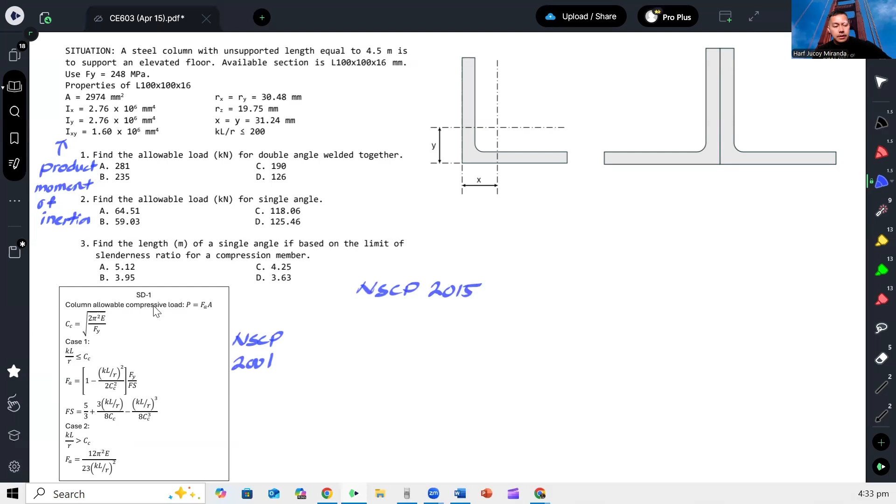The nominal compressive strength PN is Fy times AG, same as before - actually it's FCR times AG, so it's similar to this. FA is used instead since it's allowable.

Then CC, that's the limiting slenderness ratio. Previously it was 2 pi squared E over Fy. Now it's 4.71 times the square root of E over Fy.

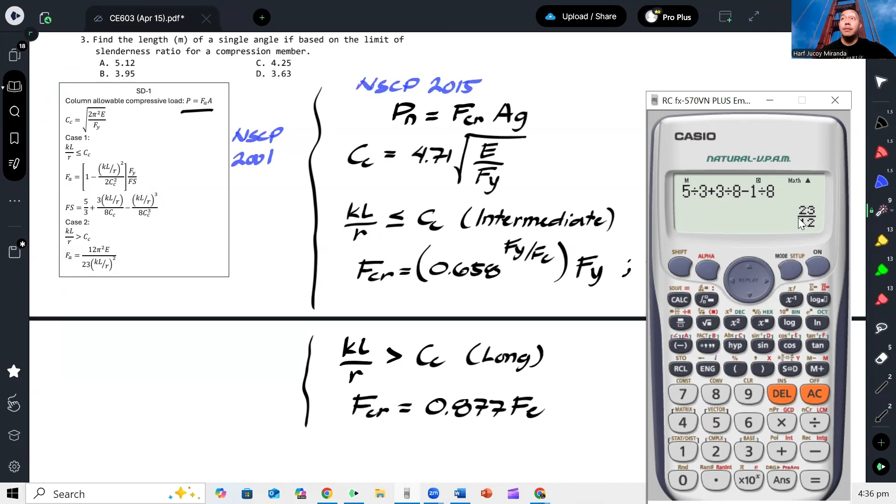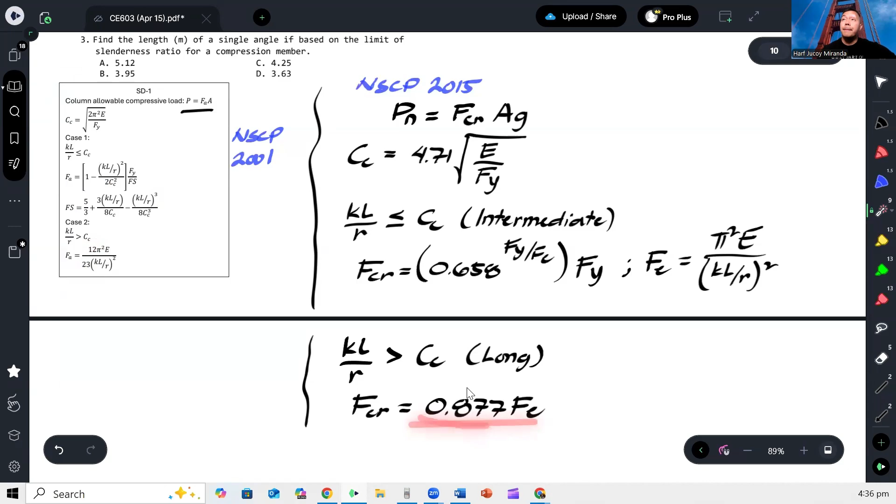That's the factor of safety applied to Euler's formula. For us now, it's 0.877. But this is still a type of provision that still appears in the board exam, so it's good that we're familiar with how to use it. This is also given by Ma'am Praxi, in case she wants it used.

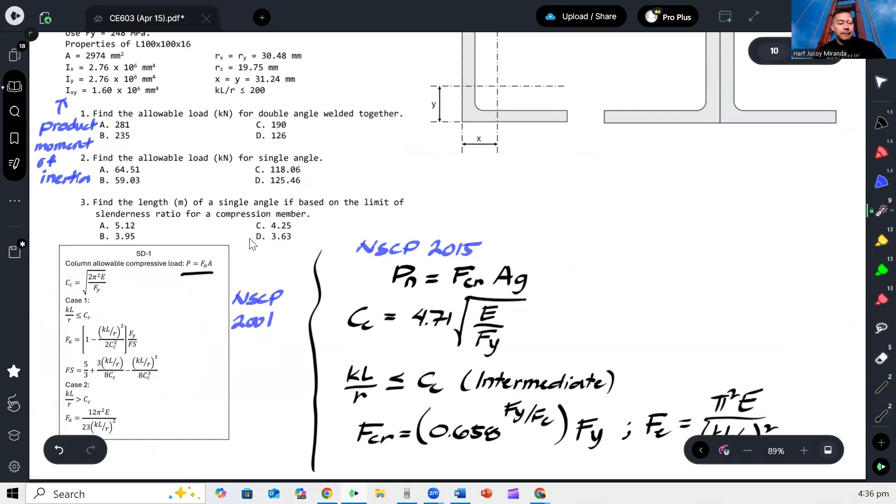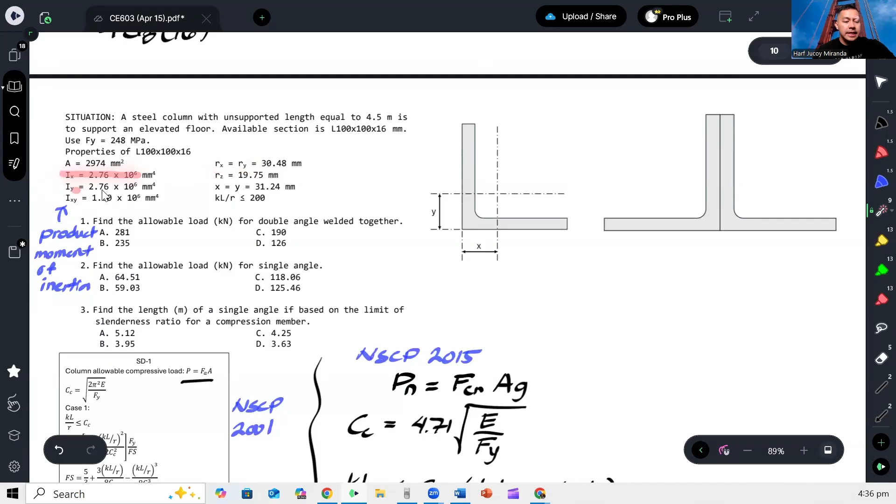Okay, here's how it works: the centroid, when on the Y axis, is now at the center. So that means, in calculating IX, it's simply 2 times the original IX.

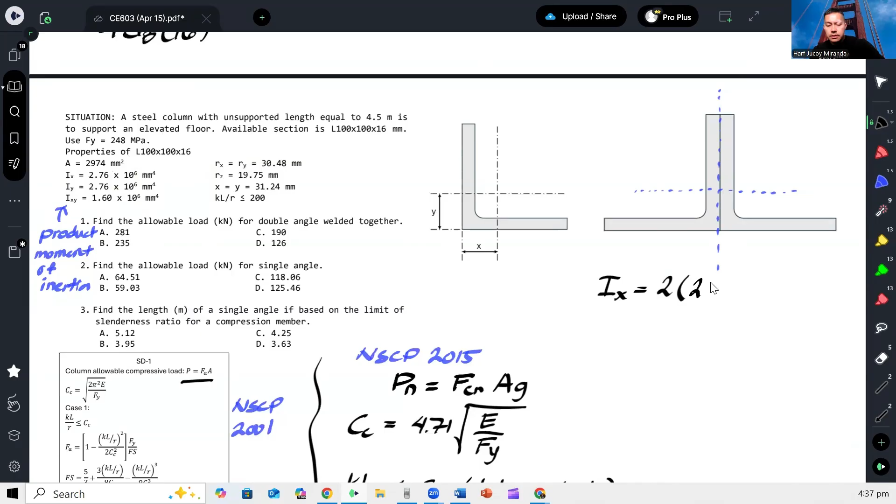Okay, why? Kasi yung Ix nito, kailangan mong i-transfer dito rin. So wala ka ng transfer formula, no? Wala ng plus AD squared. Kaya lalabas yung Ix ng double angle is ilan to? 5.52.

Pero yung Iy, kailangan i-transfer, no? Kasi ito yung original na centroid eh. Tapos andito na yung centroid natin sa gitna. Okay? So, ang tatandaan lang natin, ang distance na to is yung X mismo, which is 31.24. Okay? So, that's gonna give us yung Iy natin, 2.76 times 10 to the 6 plus transfer. Yung area, 2974 times yung X.

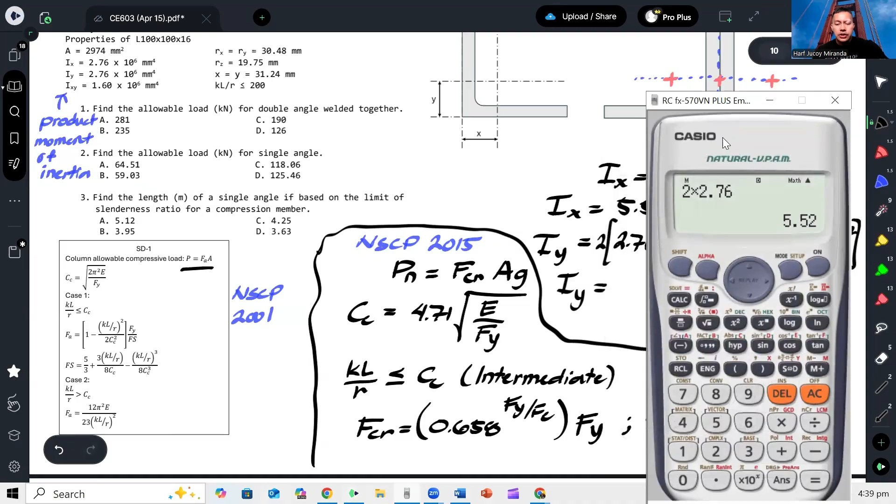Okay, so 31.24 squared. Okay, tapos times 2 kasi dalawa yung angle. So yung Iy na lalabas dito, so actually mas malaki yan. So that gives us 11.32 times 10 to the 6. So mas malaki.

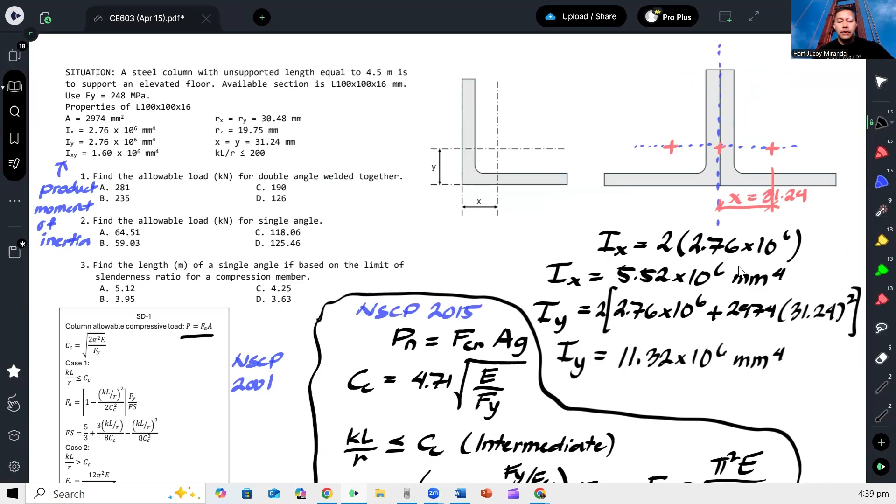Okay, and dahil ito ay column, di ba sa column, ang hinahanap natin dyan na slenderness ratio is yung critical slenderness ratio. At yung critical slenderness ratio is yung largest. No? Okay, at para ma-achieve natin yung largest na critical slenderness ratio, di ba yan ay KL over R.

Okay, we want R to be smallest as possible. Tapos yung R naman, di ba yan ay square root of I over A. So we want, in order for our R to be as small as possible, we have to make our I as small as possible. Ibig sabihin, yung I na may mas maliit, yun yung weaker axis, di ba? So ibig sabihin, yung R din na maliit, yun din yung weaker axis. And it turns out na kapag maliit yung R, malaki itong slenderness ratio. So ibig sabihin, kapag malaki yung slenderness ratio, yun yung weaker axis. Or yun yung ibig sabihin ay yun yung, or doon mangyayari yung buckling.

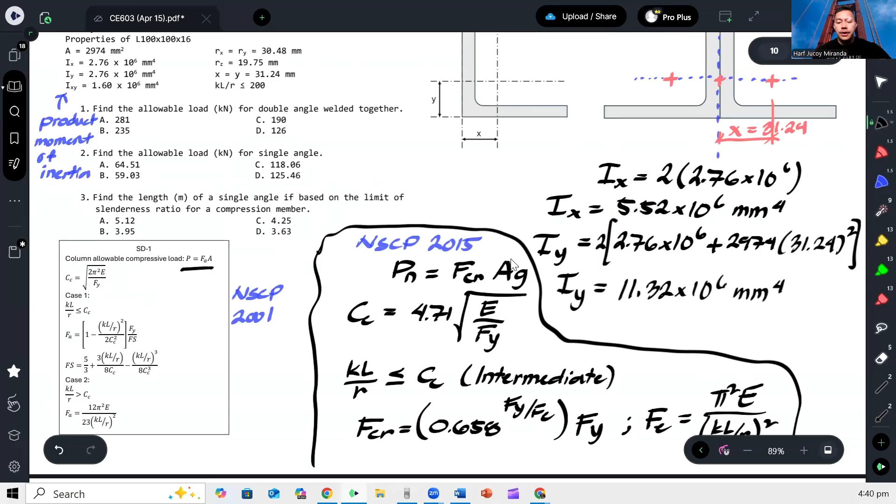Okay? So dahil kapag kinumpare natin itong dalawa, mas malaki naman to dito. So doon sa x-axis siya, possible na mag-buckle, no? So kunin na lang natin yung Rx. That is square root of Ix over A. No? Since Ix is less than Iy.

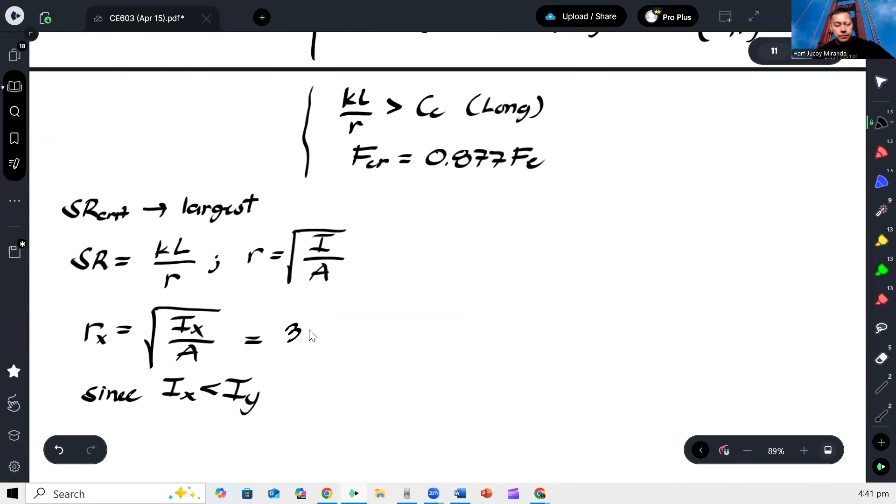So that will give us square root of 5.52 over, so take note yung area dito, hindi siya area ng isang angle kasi we are now referring to a double angle. So times 2 ng area. And that gives us 30.46. Okay?

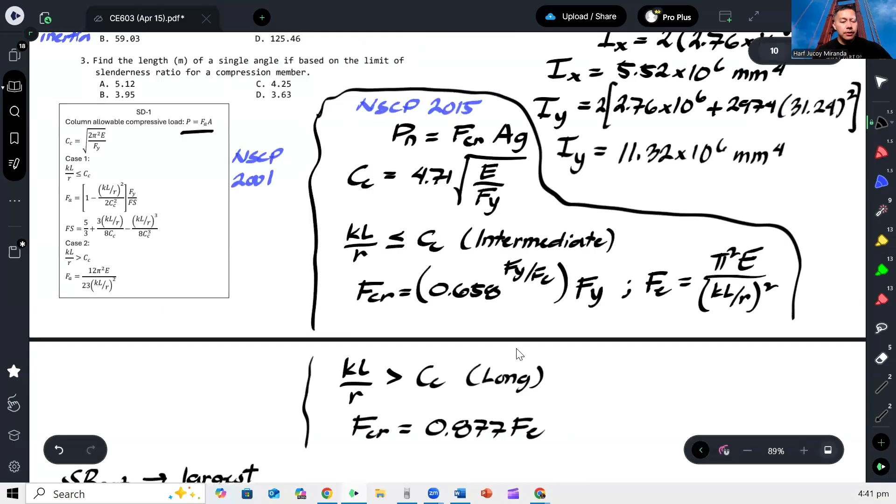And therefore, the critical slenderness ratio would be, so dito wala namang in-specify. Unsupported length is 4.5. Tapos walang in-specify na support condition sa magkabilang dulo. So pag ganyan, it's safe to assume na pin connected lang siya. So ibig sabihin K is equal to 1. Okay, so ibig sabihin this is 1 times 4,500 over R. And that gives us, okay, 147. Na-store muna natin dito sa A.

Okay? Now, we also need to calculate CC so that we can compare. So, again, in this provision, we apply 2 pi squared E over Fy. And that is Fy is 248. So, that is 126.17.

Okay, and because this is larger than CC, then case 2 tayo. So, ibig sabihin, yung Fa natin is 12 pi squared E over 23 slenderness ratio squared. And that gives us 47.2 megapascals. So therefore, our allowable load is equal to Fa times area.

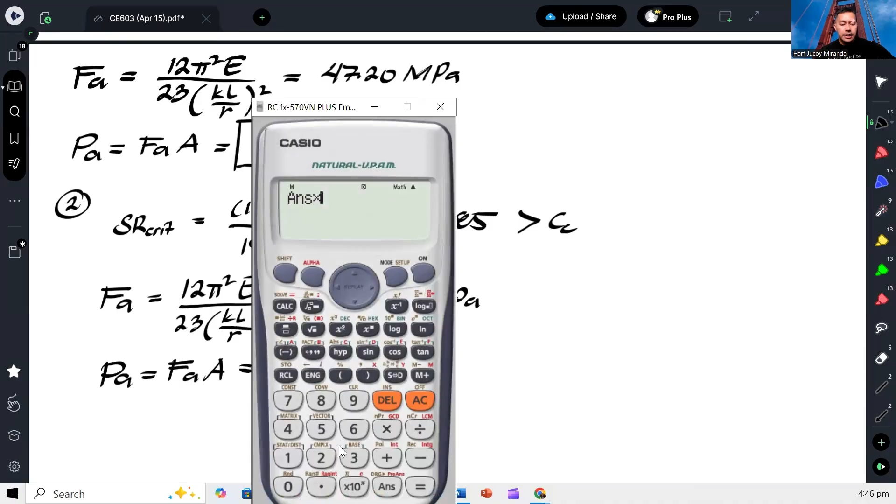Tapos kapag kinuha natin allowable load, that is FA times area. So this case, yung area natin isang angle lang. So FA times 2,974. Okay, 2,974. So once again, this is in Newton, this is in kilonewton, so 58.99 or around 59 na, no? 59 kilonewtons. So that would be the allowable load kung single angle lang.

So our answer would be approximately letter B. Okay? And what problem can you see bakit naging ganun yung capacity? Dahil sobrang laki ng slenderness ratio. Kaya naman ang tanong niya sa pangatlo, find the length of a single angle based on the limit of slenderness ratio for compression member in NSCP.

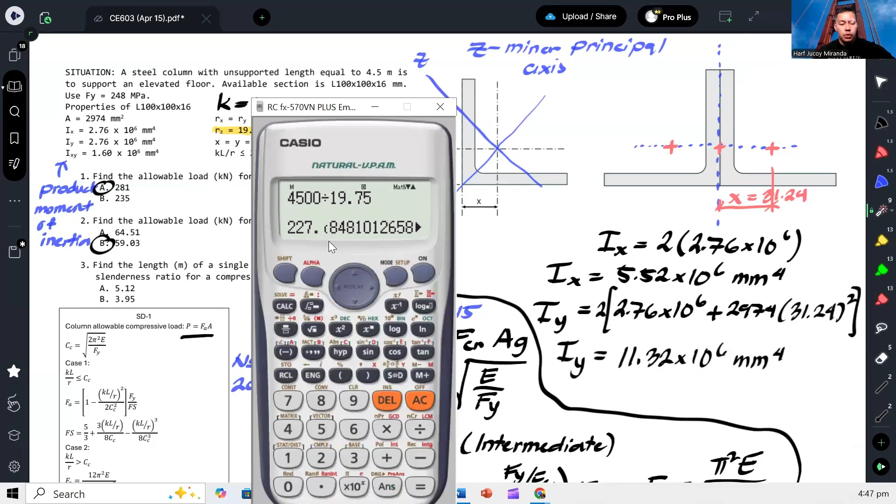Ito 'yon. So dahil napag-alaman natin na yung critical slenderness ratio, kung babalikan ko lang, ay 227. So lagpas na siya doon sa limit. So ang tanong niya ngayon, ano lang yung length na pwede mong gamitin doon sa single angle para hanggang 200 o kumbaga hindi lumagpas ng 200 yung critical slenderness ratio. So bali, ang gagawin natin, i-resolve lang natin yung L.

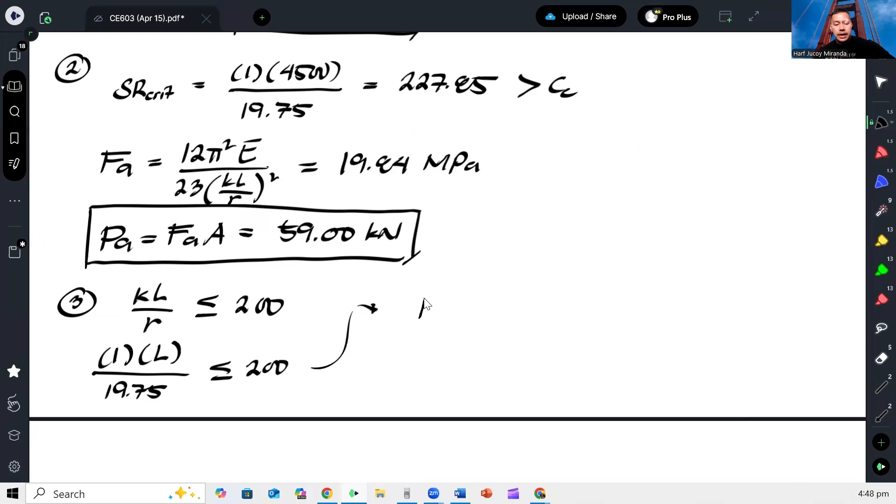So for number 3, KL over R should not exceed 200. So, ibig sabihin, K is 1, this is L over R. Yung R natin, 19.75 pa rin kasi single angle, that should not exceed 200. So, therefore, yung L natin should be at least, or should not exceed, 3,950 millimeters or 3.95 meters.

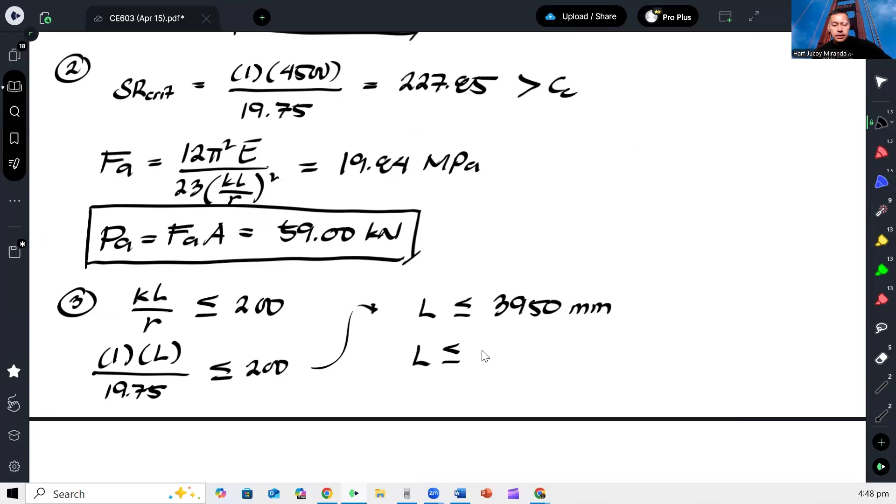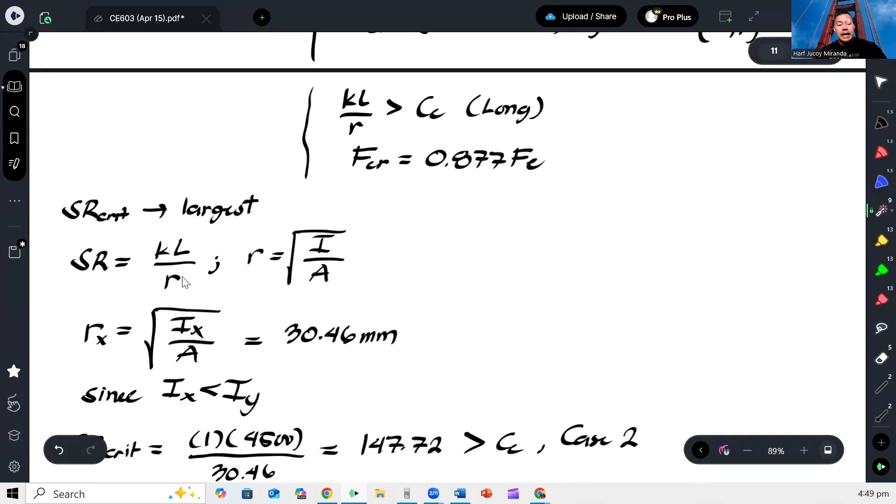So therefore, our answer here would be letter B. Okay, and nung lumabas to sa board exam, ano daw, nasa choices din daw kapag ito ang ginamit mo. Halimbawa, blinded ka na ito lagi yung ginagamit. Or kapag hindi mo naintindihan kung bakit ba pinipili yung mas malaking slenderness ratio. Okay, or kapag hindi mo naintindihan na kinokontrol ng buckling yung capacity ng column. Kaya inaalam natin sa umpisa kung aling axis siya magbabackle.

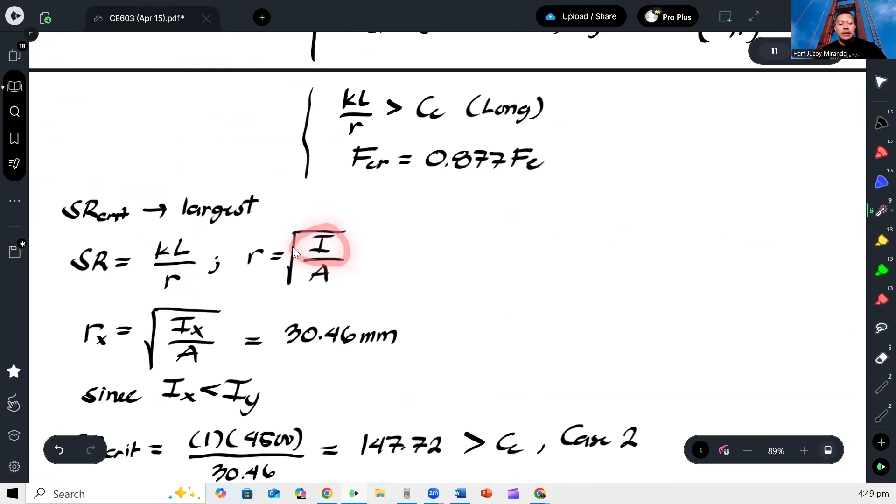At palagi magbabackle siya sa axis na pinaka-slender siya. At pinaka-slender siya kapag largest yung slenderness ratio. And doon sa formula ng slenderness ratio, kung gusto mo itong malaki, piliin mo yung maliit na R. Okay? Or yung maliit na I. Halimbawa, walang R dyan, I lang ang meron. Ganun din, no? Proportional yan. Kung maliit ito, maliit din to. Okay? And that's how we solve this problem.